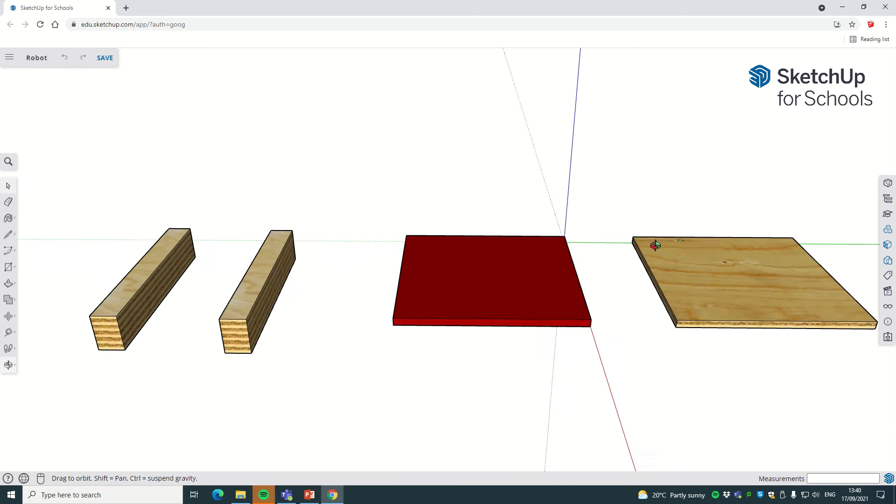In this video I'm going to show you how to move components so that they are lined up absolutely spot on perfectly, because that's another good thing about CAD, computer aided design, which is SketchUp: it's incredibly accurate. If you make something that's 95 by 95, you know it's 95 millimeters by 95 millimeters. So what we're going to do first is pop these bits of plywood onto this face, and then move the front onto the top.

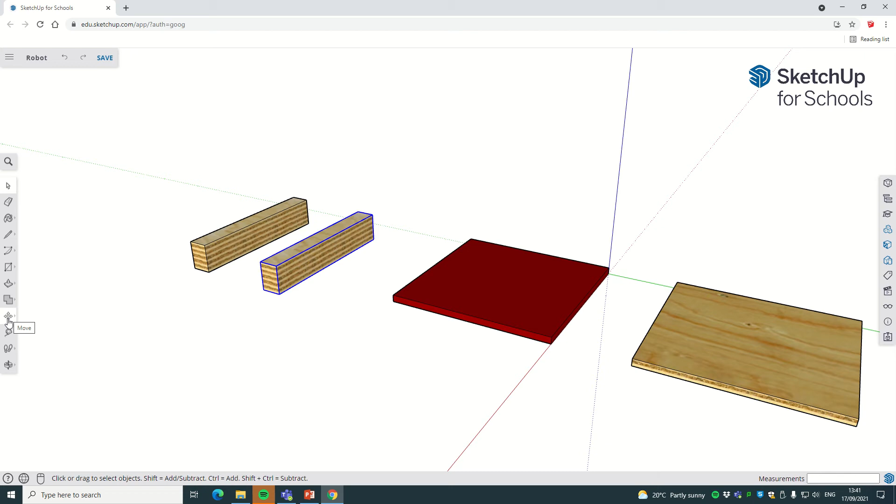As always, select tool, select the component you want to move, then go over to the left and click on the move tool, which if you hover over it says move. Select that, and then we want to join this point here, the bottom right hand corner, to this top point here on that bit of plywood.

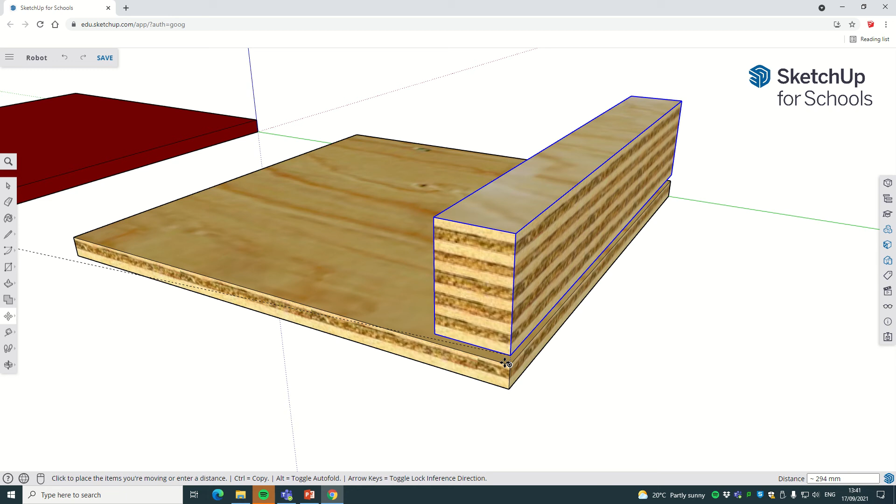I'll zoom in a bit and click on that corner, click and release, and you'll see it start moving. I'll scroll out and move it over here, then zoom in so it snaps onto that corner. See how it snaps? You move it there and it just clicks into place, like Lego, it just snaps to that point. When it snaps and you click, you know that it's being perfectly joined up. Perfect, there we go.

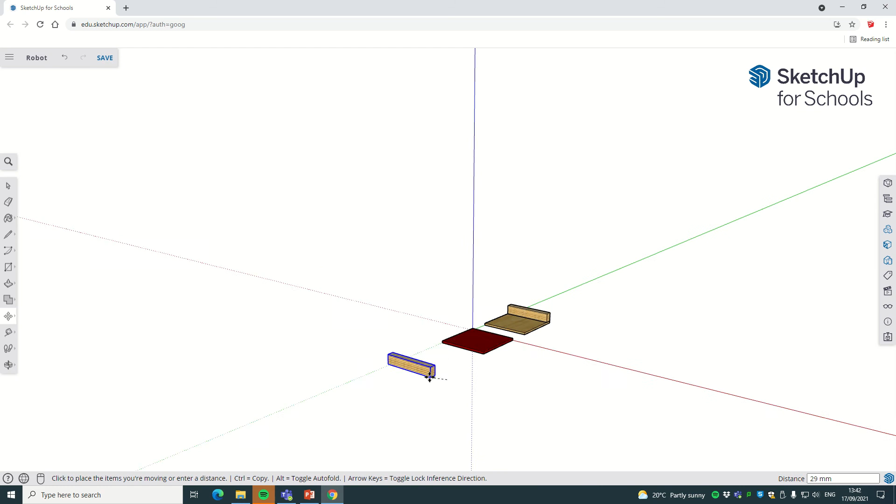And then we're going to do the same for the other piece. Zoom in, select it, move tool. This time we're going to click on this point here, select it, it goes blue, click on the little dot, then zoom out a bit and zoom in towards where we want it to go. As you zoom, your mouse just follows you, so the piece is attached to where your mouse goes. I'll zoom in and snap it to this point on the top here. Again, it's very satisfying, it just clicks. Make sure you don't click somewhere that's obviously not the corner, you need to make sure it actually looks perfect.

But it should just go thump, click again, and you've got those two bits beautifully laid on top of there. This is where your phone would go in, so it needs a bit of height to fit the phone in.

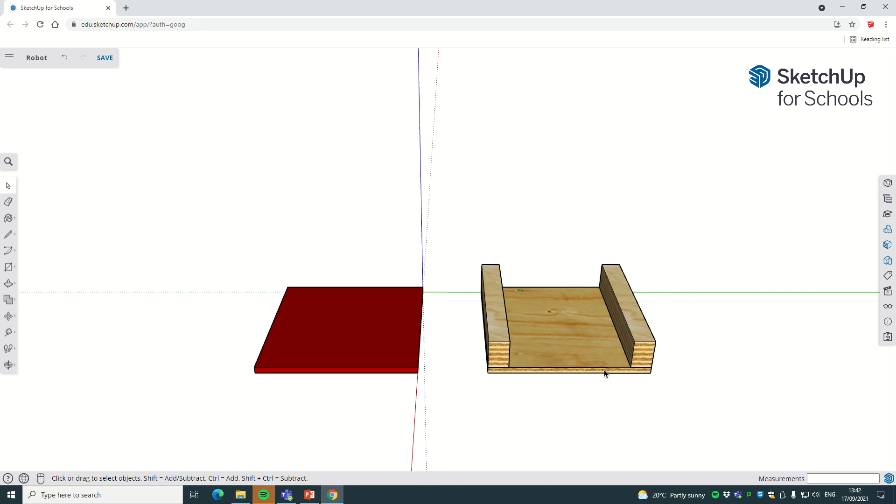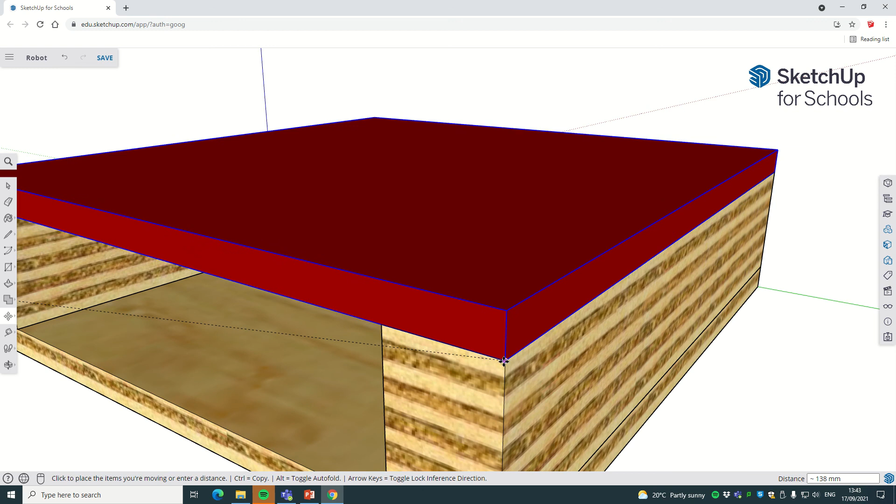Then we're going to select the top piece of MDF, go back to the move tool, click on that, then select that bottom point there again, the blue one, click and release, zoom out, move it over, zoom in, and we're just going to move it into place, and it just snaps. See how it just clicks in place? Have a little look round. Yep, that looks perfect. Click, press the mouse button, and we've got those four components beautifully stuck on top of each other, ready to go.

Next, to make the bottom piece that's going to go in there to hold the phone in place.